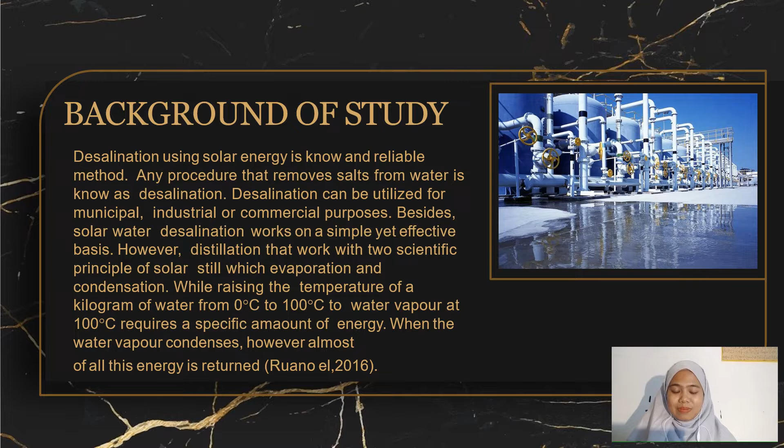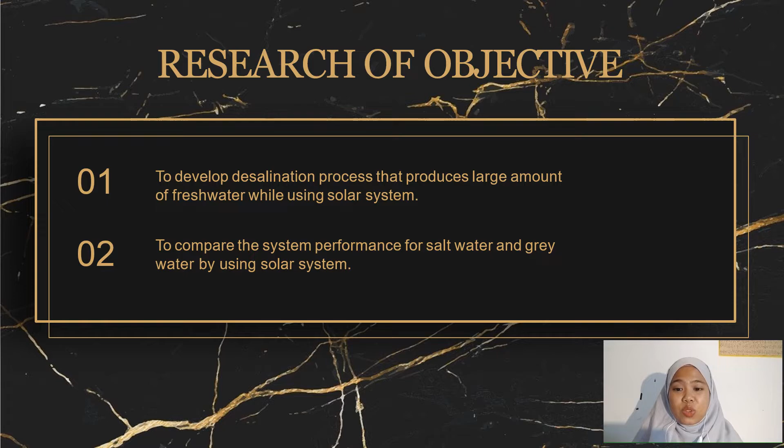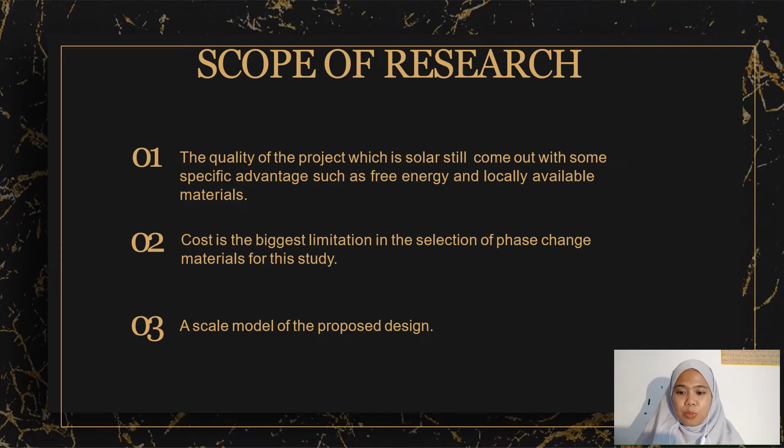Next slide, I will talk about the scope of this project. First, develop the quality of the project, which is a solar still with some specific advantages such as being environmentally friendly, free energy, and using locally available materials. Secondly, the main limitation in this experiment is cost, which limits the selection of phase change materials, since the phase change material used must be inexpensive while still possessing the necessary properties for use as thermal energy storage. Last, a scale model of the proposed design.

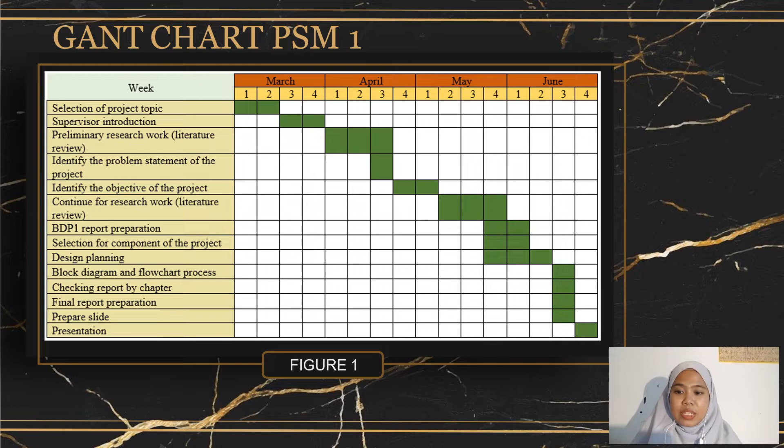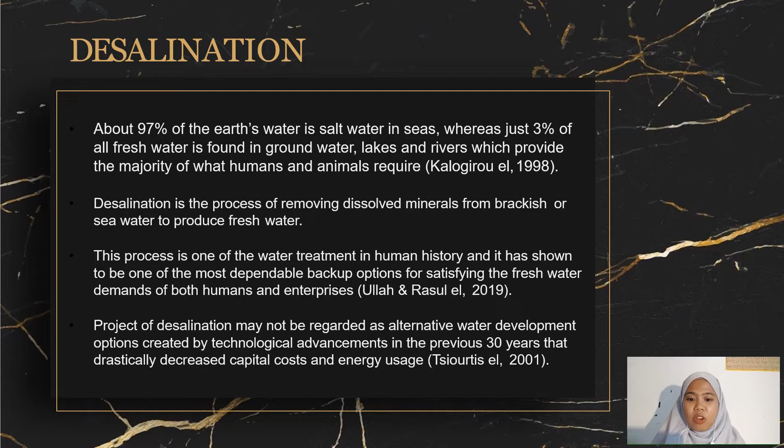After that, I will explain the next slide, which is literature review. First, desalination. From the journal, about 97% of the earth's water is salt water in seas, whereas just 3% of all fresh water is found in groundwater, lakes and rivers, which provide the majority of what humans and animals require. In more detail, desalination is the process of removing dissolved minerals from brackish or seawater to produce fresh water. This process is one of the water treatments in human history, and it has shown to be one of the most dependable backup options for satisfying the freshwater demands of both humans and enterprises.

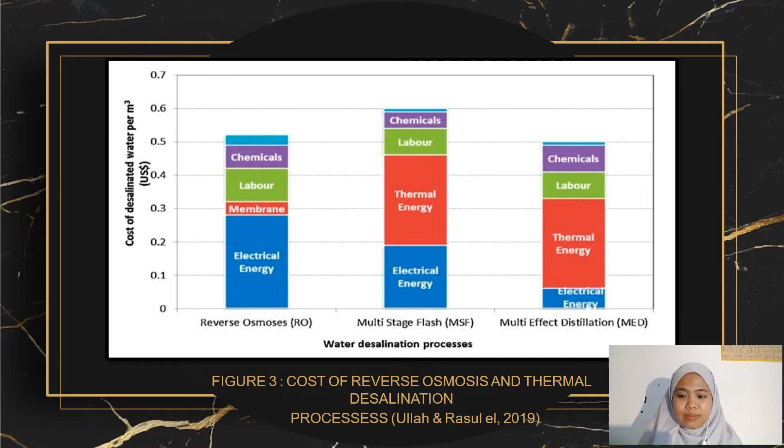The method of reverse osmosis was first commercialized in the 1970s. In the United States, reverse osmosis is known as the most frequently utilized desalination technique. On the other hand, reverse osmosis is the most popular technique for new desalination installations, providing for 44% of global desalination capacity and 80% of the over 15,000 desalination units constructed globally.

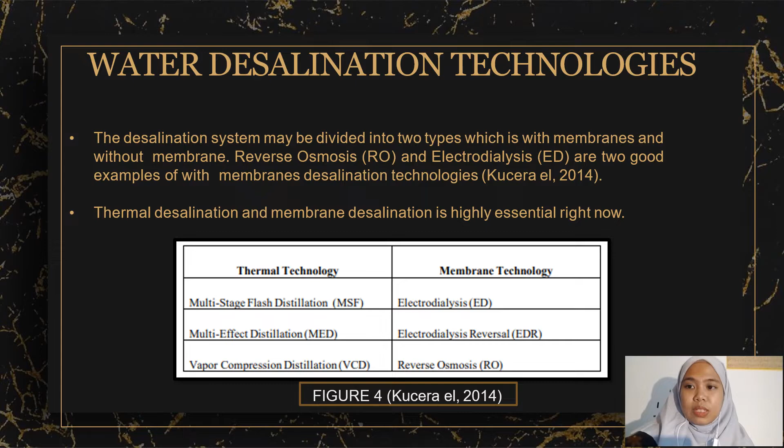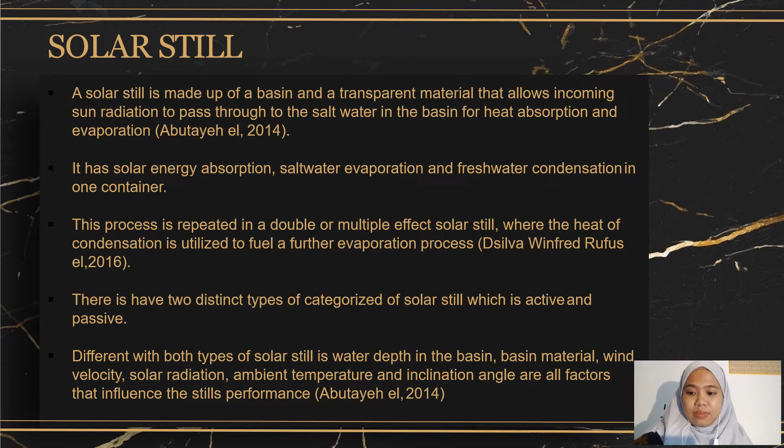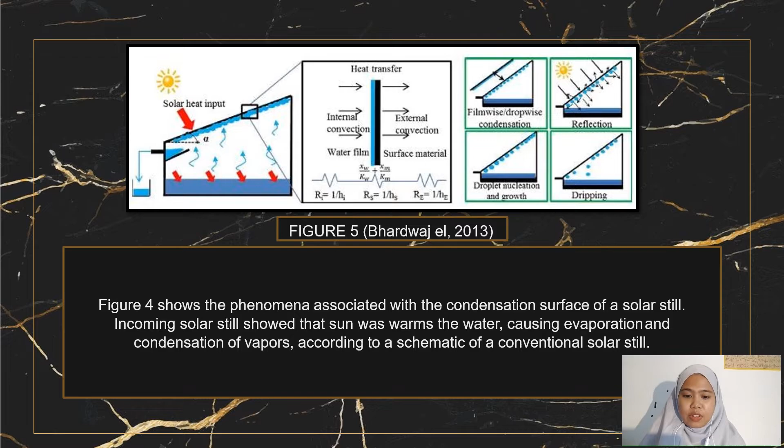Next, for both types of solar still, water depth in the basin, material, wind velocity, solar radiation, ambient temperature, and inclination angle are all factors that influence the still's performance. In detail, figure 4 shows the phenomena associated with the condensation surface of a solar still. The sun warms the water, causing evaporation and condensation of vapors, according to a schematic of a conventional solar still.

I will continue to the methodology. This is my flow chart. We start with identification of the objective and problem statement. Then we go to the weather data at Ayer Keroh, Melaka. Next, research on the process, components and parameters to use. Next, followed by conceptual design to get the illusory using SolidWorks.

Then we continue with the pre-experiment, which shows the flow of the experiment that I will go through. After the pre-experiment, I will build the prototype using an aluminium tank. Then we start the experiment for 2 samples of water: sample 1 is salt water and sample 2 is grey water. After getting the 2 samples, we analyze the data and the experiment ends.

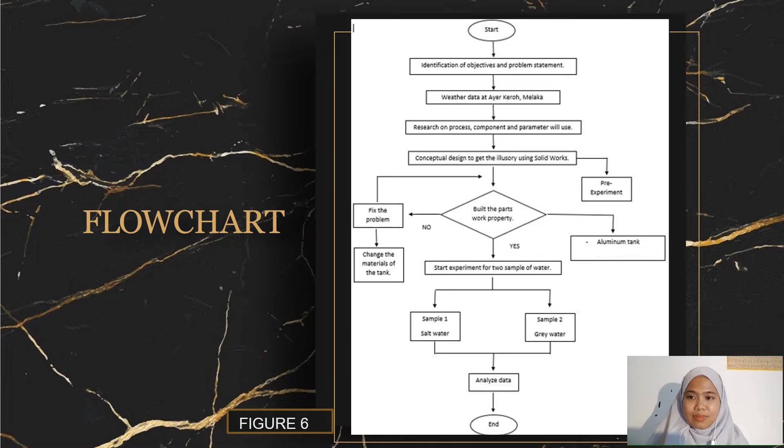Then we continue to the design of the solar still. There is one design stage. The design is an aluminium tank which has 2 compartments for 2 samples, salt water and grey water, and wrapping plastic on top of the tank used to concentrate solar energy into the solar collector that will produce the water vapor. The condensing tank is made from aluminium sheet shaped as a cube with a thickness of 0.001 meter.

The condensing tank width and length are 0.235 meter by 0.35 meter. The front height of the condensing tank is 0.135 meter and the back height is 0.35 meter. From the design above, the aluminium sheet has good thermal conductivity. Next, the condensing tank is designed with an angle of about 60 degrees because it is easy to trap the water vapor into the water storage.

Next, the condensing tank is designed with 2 compartments for 2 samples, salt water and grey water. Compartment A measures 0.235 meter by 0.175 meter, and the front height of compartment A is 0.26 meter and the back height is 0.35 meter. That is for compartment A.

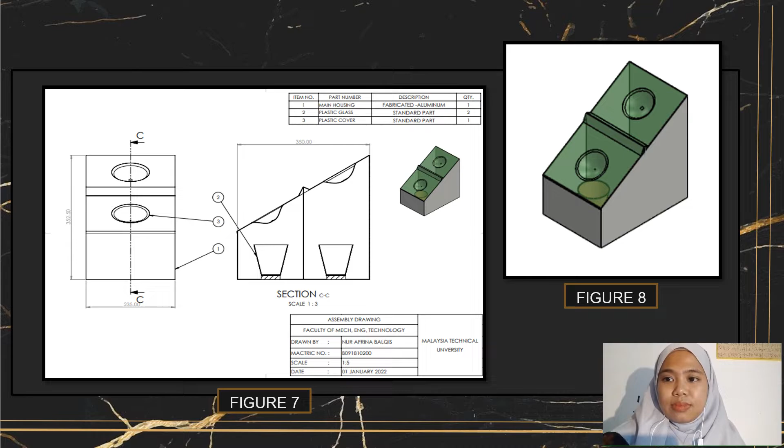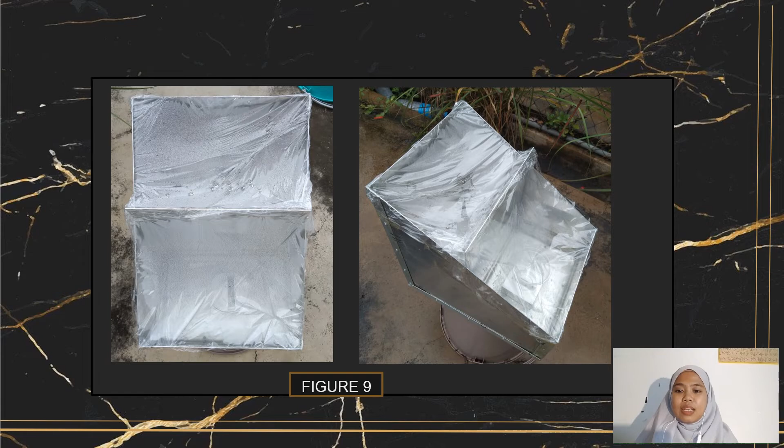Next, the experiment setup. This project was conducted on 28 December 2021, from 10 a.m. to 6 p.m., collecting data readings every 2 hours. The flow process of still distillation is shown in figure 9. The salt water and grey water samples are put in the condensing tank that has 2 compartments: compartment A holds the grey water and compartment B holds the salt water.

Next, the water storage is put at the center of both compartments to collect the water vapor of the 2 samples; each compartment uses one water storage. Then the condensing tank is placed under sunlight, concentrated on the water sample. The wrapping plastic also helps concentrate the sunlight and heat up the water sample faster, so there is evaporation and condensation. Then the wrapping plastic drips the water to the water storage.

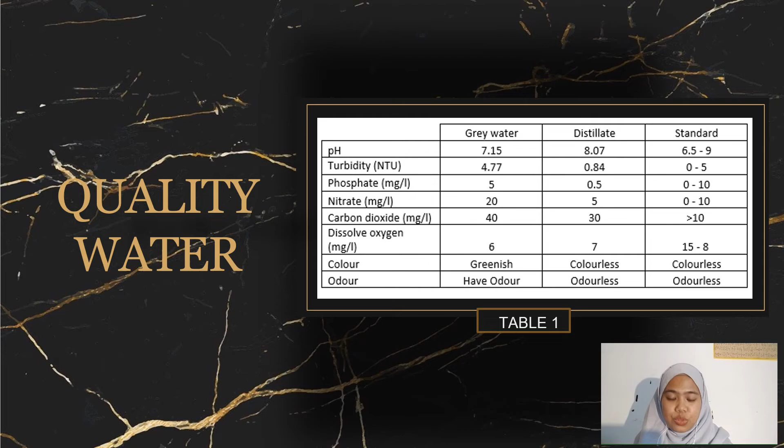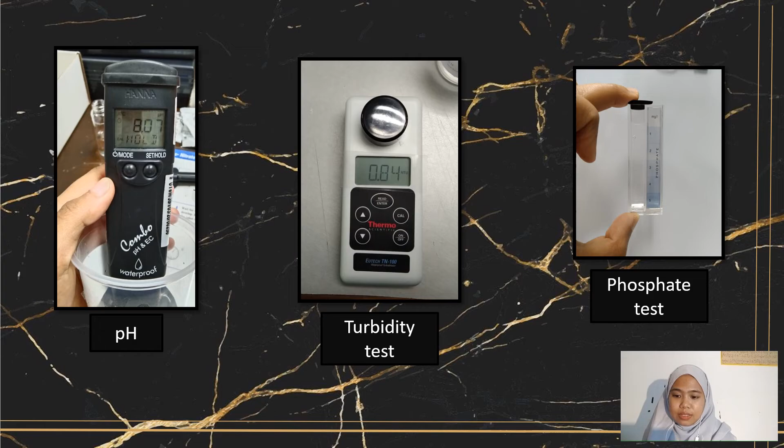Next is nitrate testing. The testing is the same as phosphate testing: just mix the sample and nitrate reagent, shake until it dissolves, then wait 1 minute, and we will get the result. The results can be seen from the table on the slide before, but for dissolved oxygen and carbon dioxide testing, the procedure is different.

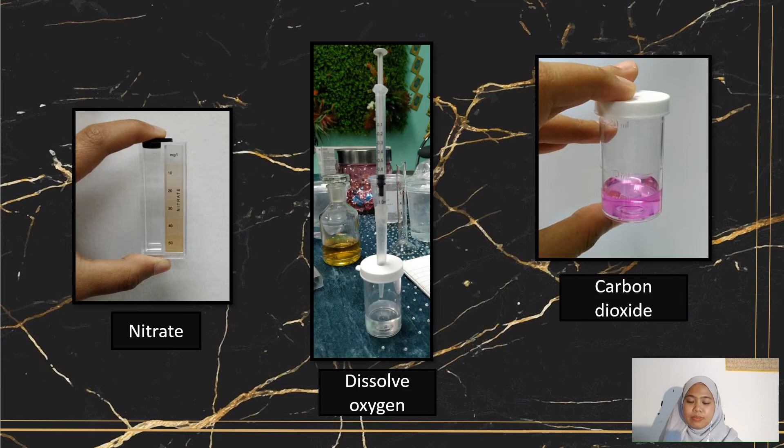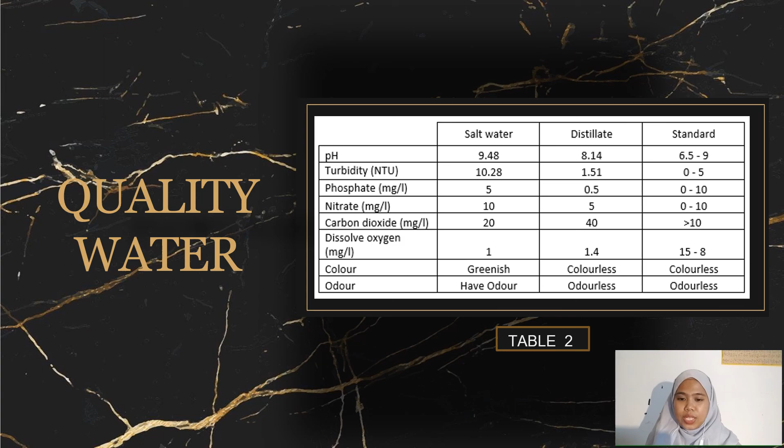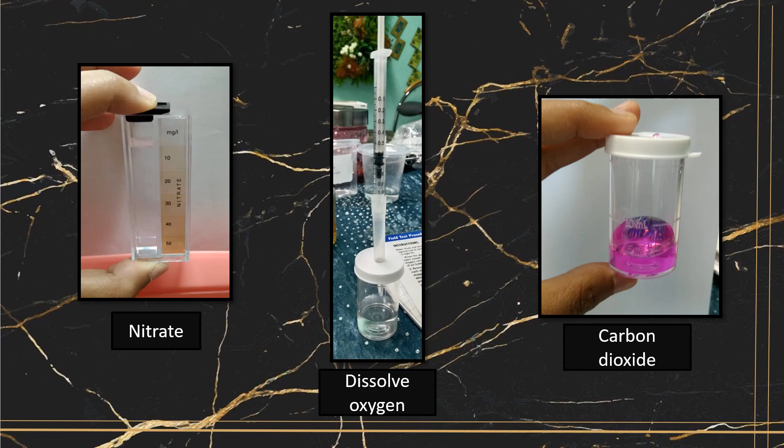So, in conclusion, an aluminium tank with wrapping plastic was used to create a solar distillation condensing tank. The condensing tank was designed to be 0.235 meter by 0.35 meter in size. According to the research, the condensing tank produced 13.8 milliliters of water per day with a solar radiation intensity of 498.7 watts per square meter over an 8-hour period, while the generation from salt water with a solar radiation intensity of 498.7 watts per square meter is 12.2 milliliters per day.

In this research, the condensing system used solar energy to generate fresh water with 4.41% efficiency for grey water, and the efficiency for salt water is 2.171. The efficiency difference demonstrates concentrating solar energy utilizing wrapping plastic and an aluminium condensing tank by 63.33%.